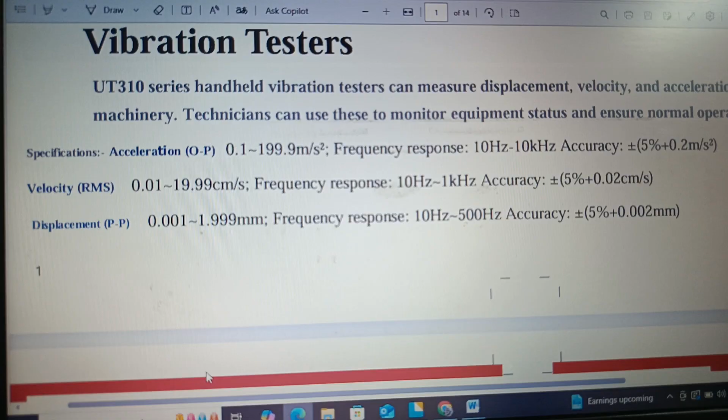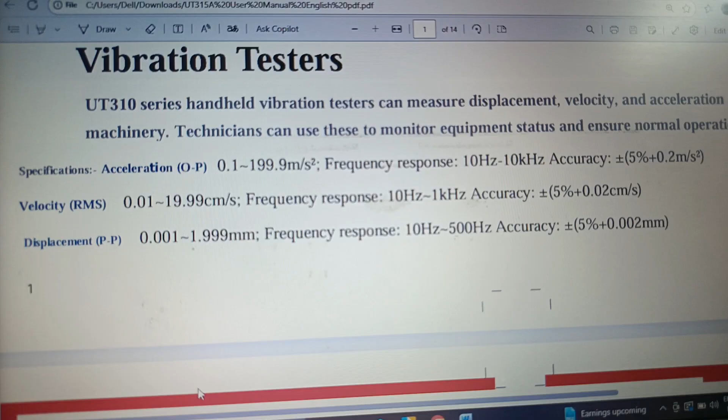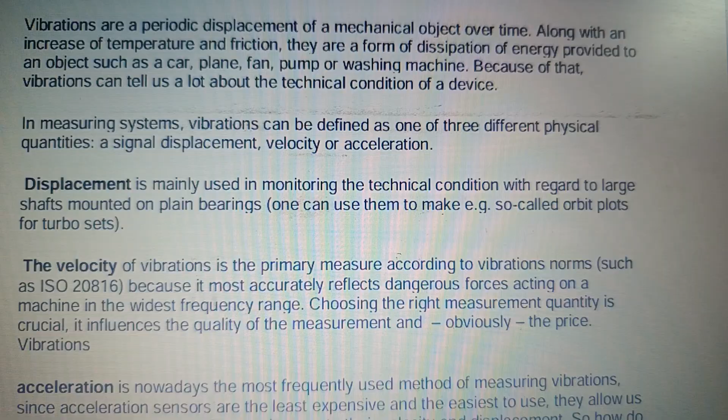Vibrations are a periodic displacement of a mechanical object over time, along with an increase in temperature and friction. They are a form of dissipation of energy provided to an object such as a car, plane, fan, pump or washing machine. Because of that, vibration can tell us a lot about the technical condition of a device.

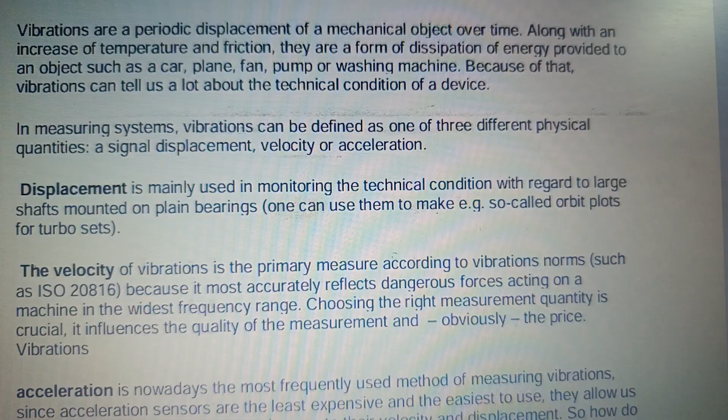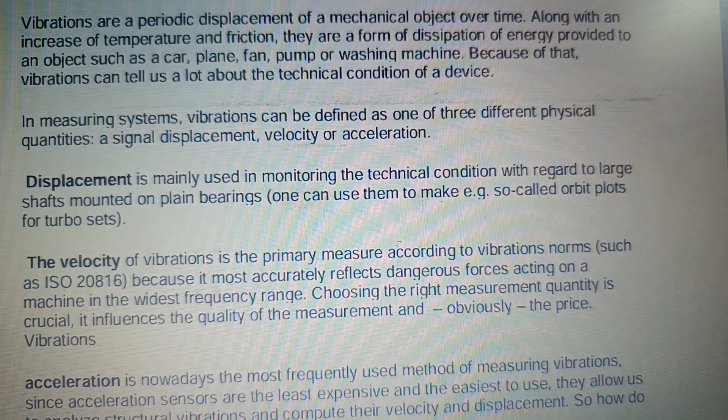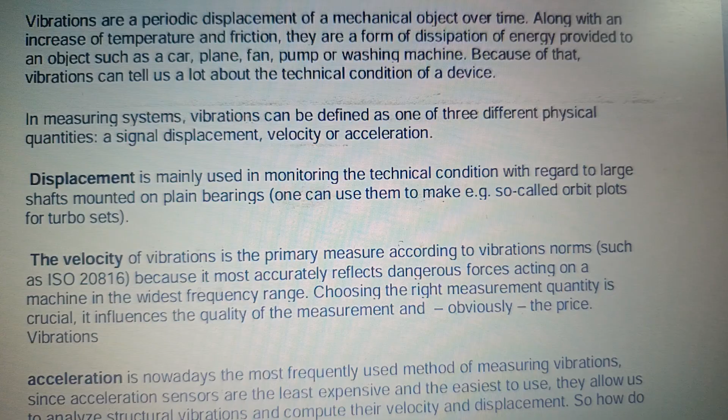In measuring systems, vibration can be defined as one of three different physical quantities: signal displacement, velocity or acceleration. Displacement is mainly used in monitoring the technical condition with regard to large shafts mounted on plain bearings. One can use so-called orbit plots for turbo sets.

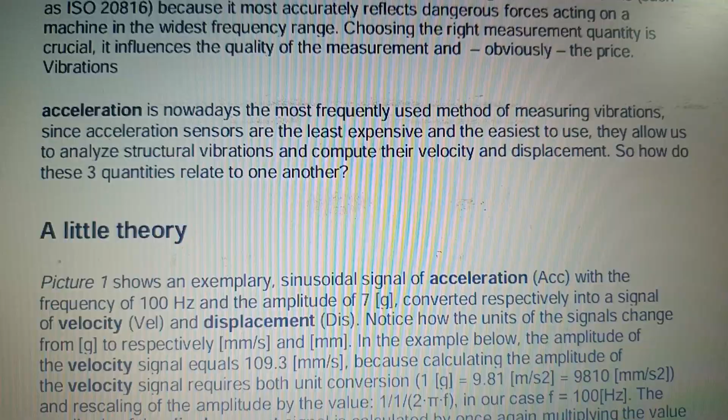The velocity of vibration is the primary measure according to vibration norms, because it most accurately reflects a dangerous force acting on a machine in the widest frequency range. Choosing the right measurement quantity is crucial in influencing the quality of measurement and obviously the price.

Acceleration is nowadays the most frequently used method of measuring vibration, since acceleration sensors are the least expensive and allow us to analyze vibration and compute their velocity and displacement. So how do the three quantities relate to one another?

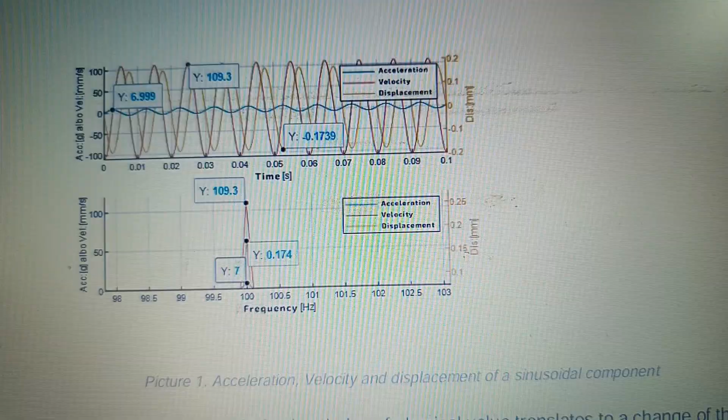Picture 1 shows a sensor signal of acceleration ACC with a frequency of 100 Hz and amplitude of 7 converted respectively into a signal of velocity and displacement. Notice how the unit of the signal changes respectively to mm per second and mm in the example below. The amplitude of the velocity signal equals 109.3

mm per second. Because calculating the amplitude of the velocity signal requires both unit conversion, 1g is equal to 9.81 meter per second square, which is equal to 9810 mm per second square, and recalculating the amplitude by the value 1/(2 × pi × f), where in our case f is equal to 100 Hz.

The amplitude of the displacement signal is calculated by once again multiplying the value of the velocity signal amplitude by the rate 1/(2 × pi × 100), as shown in figure 1. Conversion of the physical unit does not change the frequency value of the component. Using this method, one can convert between quantities describing vibration. It is worth noting that in general the acceleration signal is the highest and displacement signal the least.

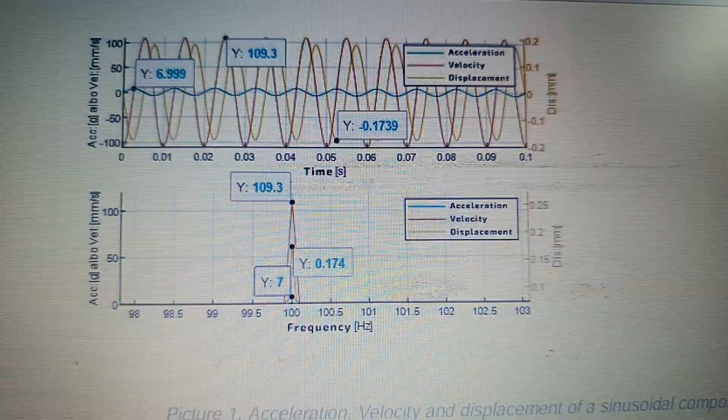In spectrum analysis, the choice of physical value translates to a change of the spectrum shape, and so in figure 2, the acceleration signal boosts the component with

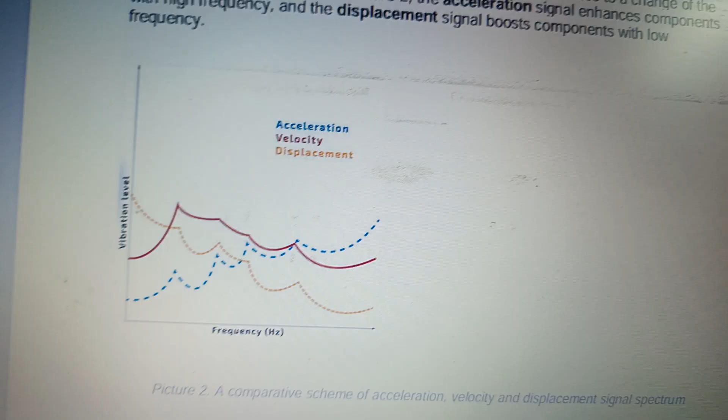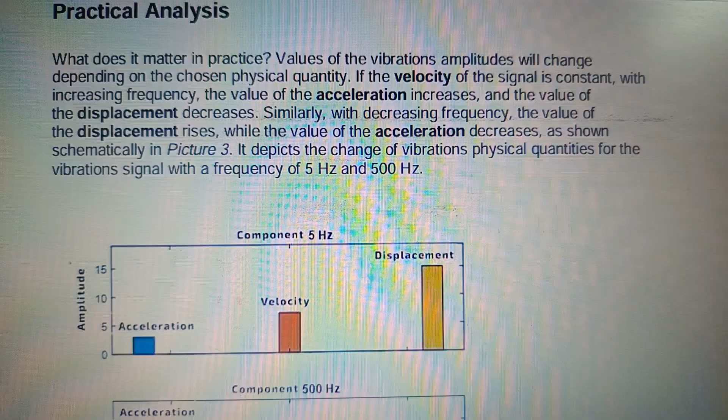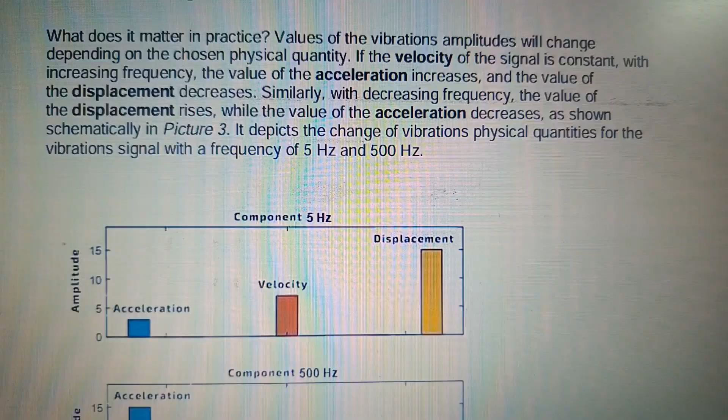Practical analysis: why does it matter in practice? The value of the vibration amplitude will change depending on the chosen physical quantity. If the velocity of the signal is constant with increasing frequency, the value of acceleration increases and the value of displacement decreases. Similarly, with decreasing frequency, the value of displacement rises while the value of acceleration decreases.

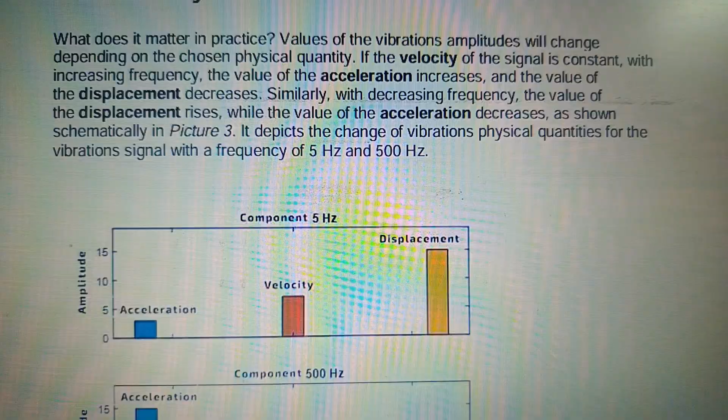Similarly, picture 3 depicts the change of vibration physical quantities for the vibration signals with the frequency of 5 Hz and 500 Hz,

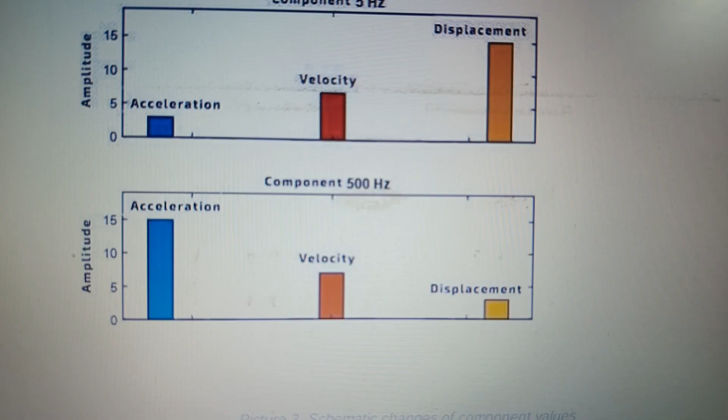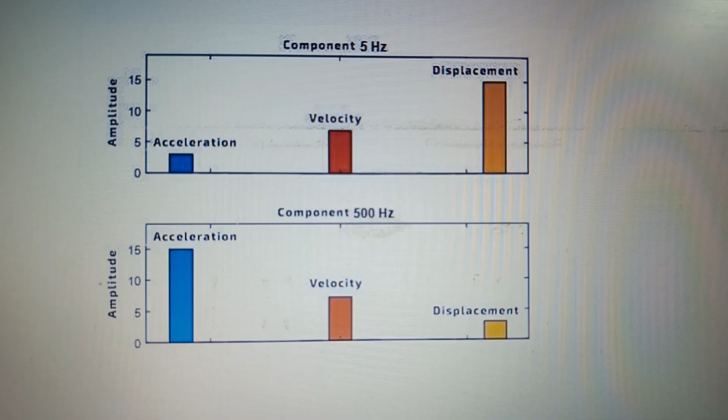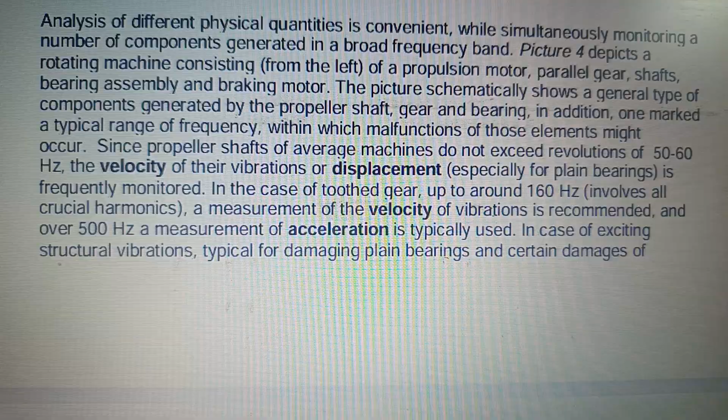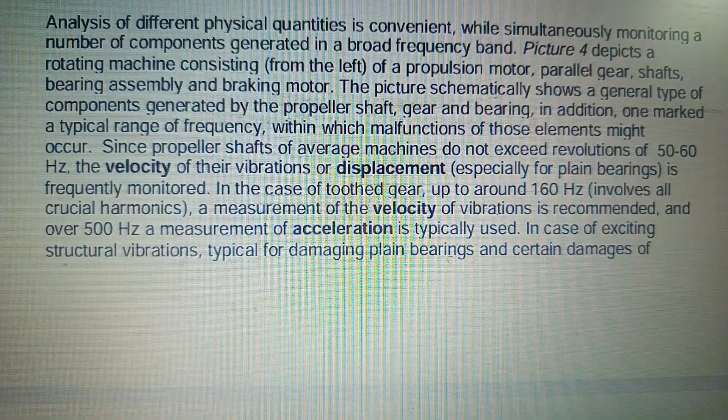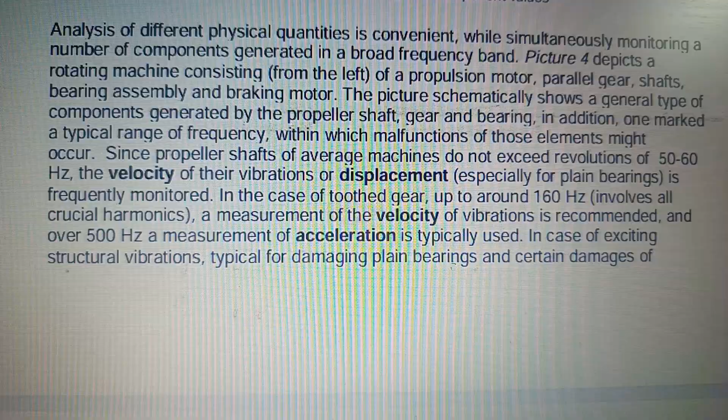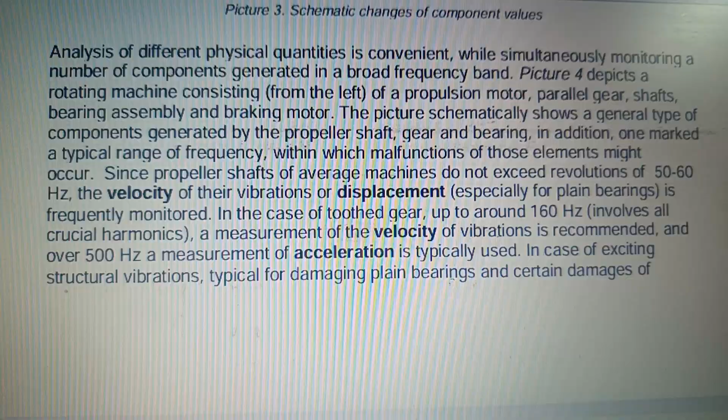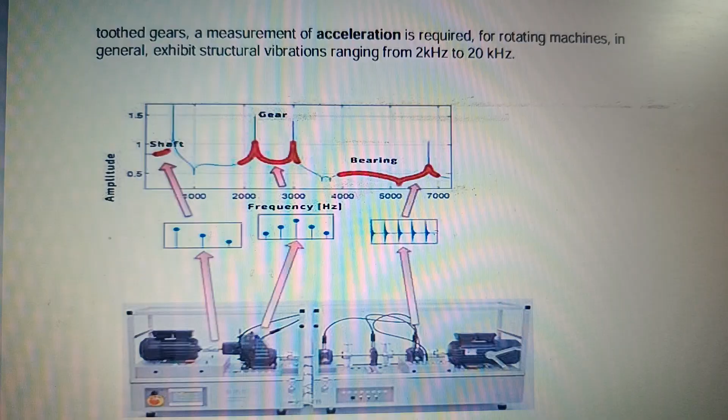For toothed gear, measurement of acceleration is required for rotating machines, in general exhibit structural vibrations ranging from 2 kHz to 20 kHz,

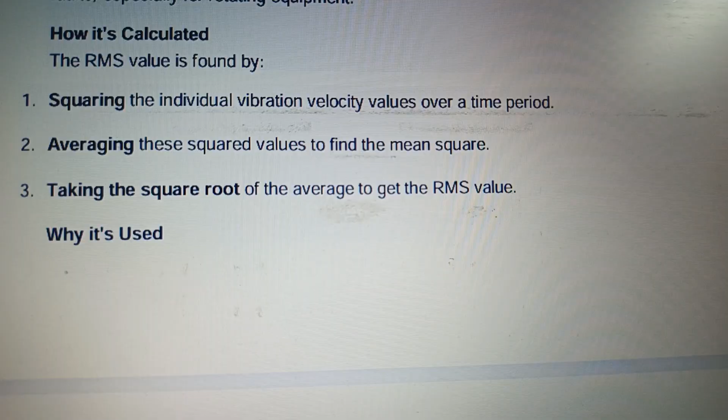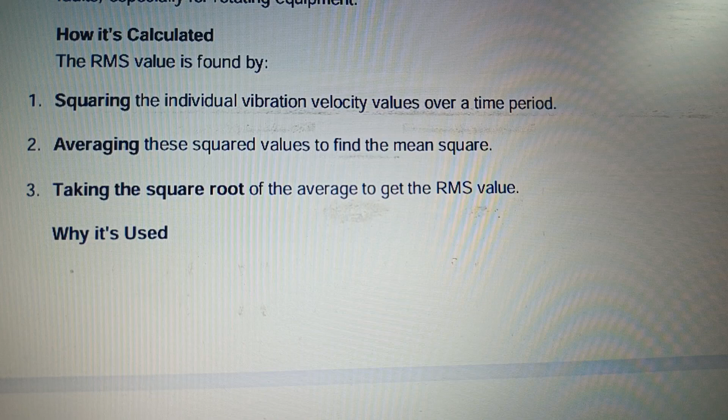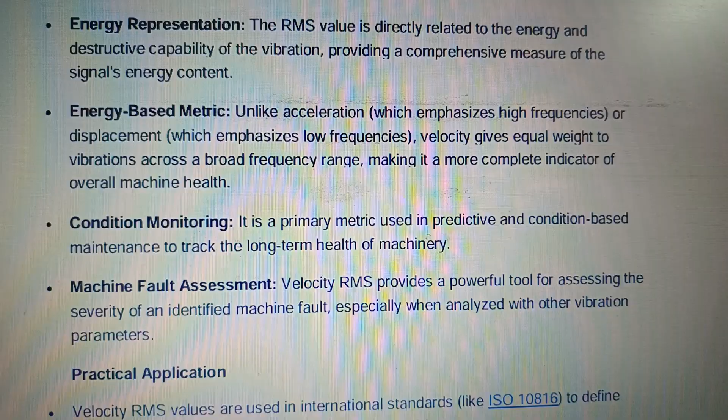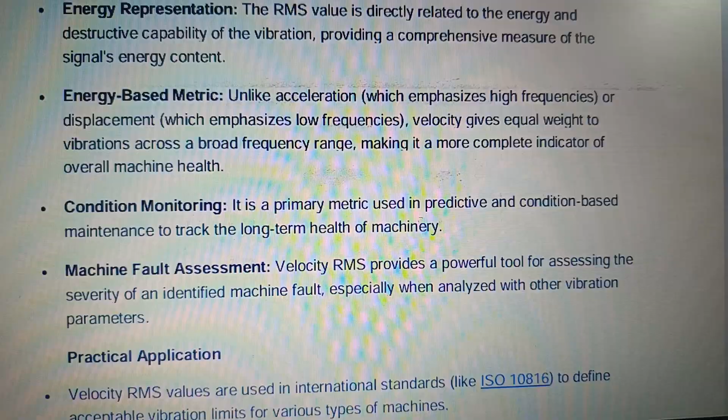squaring the individual vibration velocity values over a time period, averaging these squared values to find the mean square, and taking the square root of the average to get the RMS value. Why it's used? Energy representation. The RMS value is directly related to the energy and destructive capability of the vibration, providing a comprehensive measure of the signal energy content.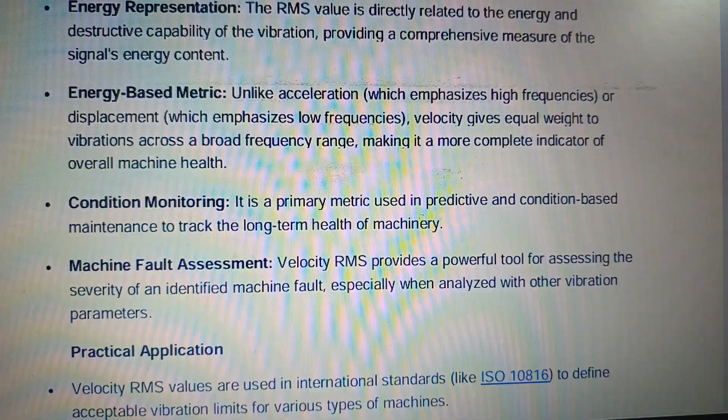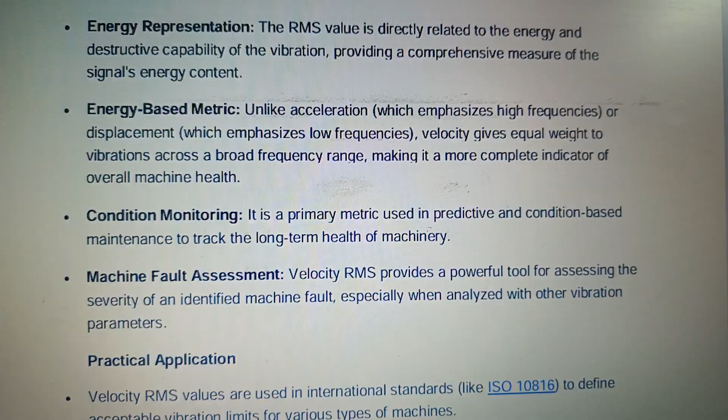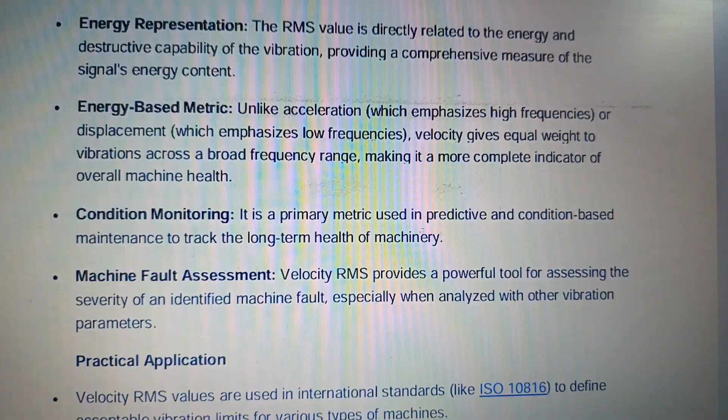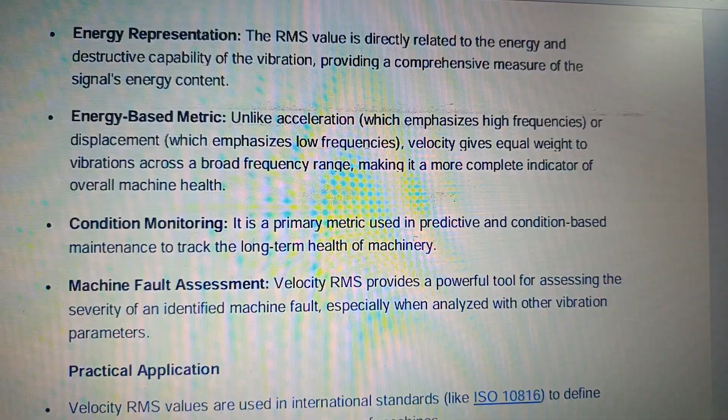Energy-based metrics: unlike acceleration, which emphasizes high frequency, or displacement, which emphasizes low frequency, velocity gives equal weight to vibration across a broad frequency range, making it a more complete indicator of the overall machine health condition. Monitoring condition: it is a primary metric used in predictive and condition-based maintenance to track the long-term health of machinery.

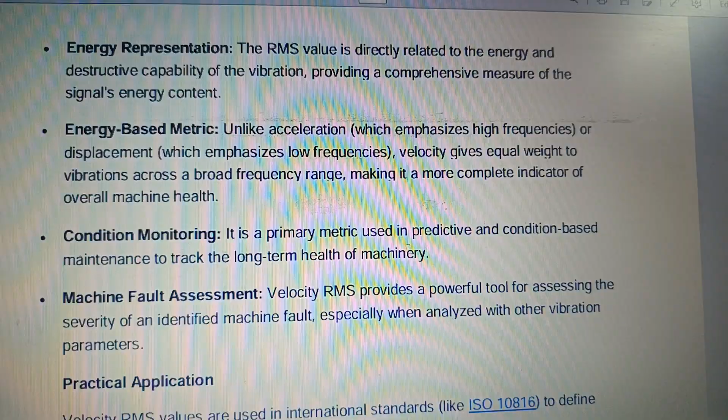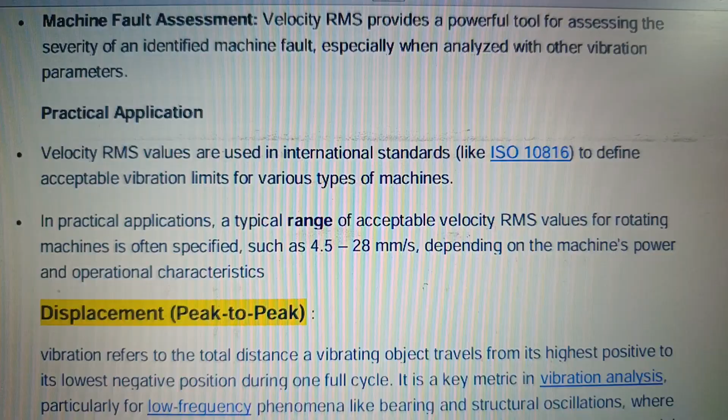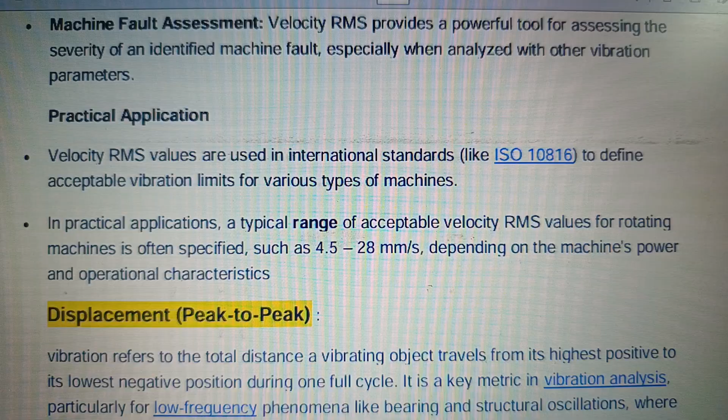Machine fault assessment: velocity RMS provides a powerful tool to estimate the severity of identified machine faults, especially when analyzed with other vibration parameters. Practical application: velocity RMS values are used in international standards for acceptable vibration limits of various types of machines. In practical application, a typical range of acceptable velocity RMS values for rotating machinery is often specified, such as 4.5 to 28 millimeters per second, depending on the machinery power and operating characteristics.

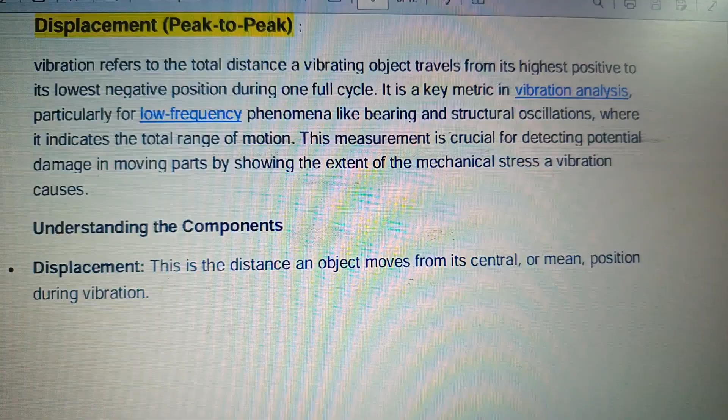Displacement peak to peak. Displacement peak to peak vibration refers to the total distance a vibrating object travels from its highest position to its lowest negative position during one full cycle. It is a key metric for vibration analysis of low frequency phenomena like bearing and structural oscillation, where it indicates the total range of motion. The measurement is critical for detecting potential damage in moving parts by showing the extent of the mechanical stress vibration causes.

Understanding the components: displacement is the distance the object moves from the central mean position during the vibration. Peak to peak: this value represents the difference between the maximum positive amplitude and the maximum negative amplitude of the vibration waveform. Why it is used? Low frequency vibration: displacement is the dominant measure for low frequency, that is below 1200 cpm or 20 hertz, in structures and rotating machinery. Mechanical stress: the peak to peak value is directly related to mechanical stress and can be used to identify potential machine damage before it causes severe failure.

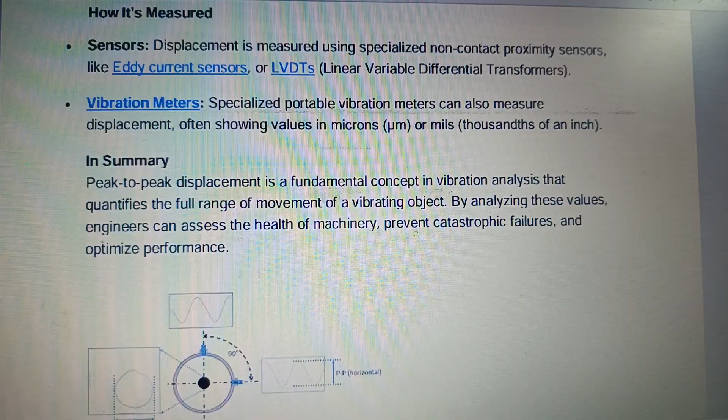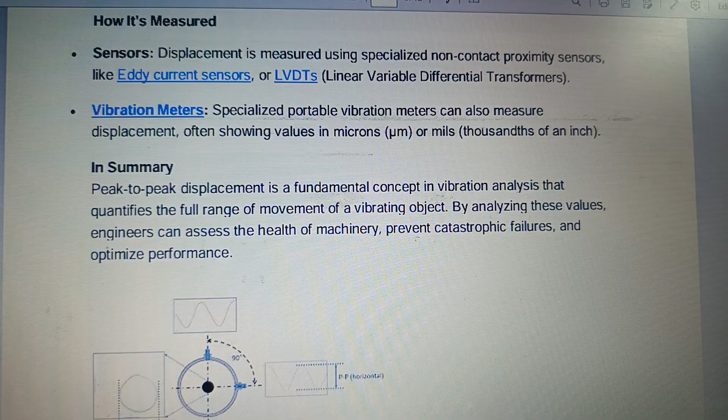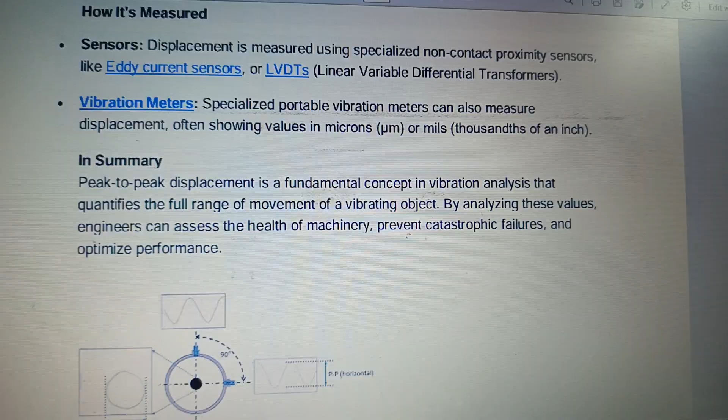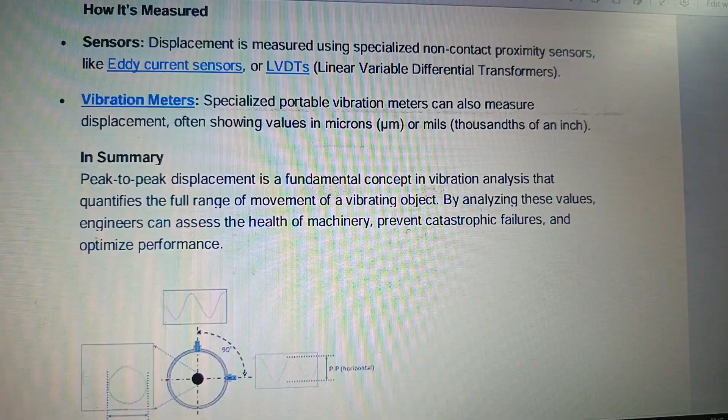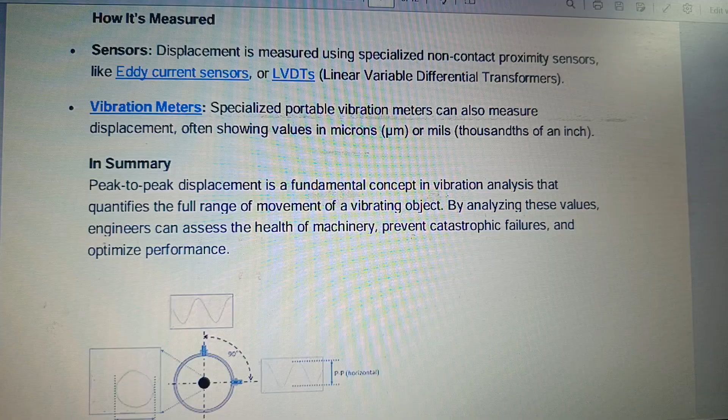In summary, peak to peak displacement is a fundamental concept in vibration analysis that quantifies the full range of movement of a vibrating object. By analyzing these values, engineers can assess the health of machinery, prevent catastrophic failures, and optimize performance.

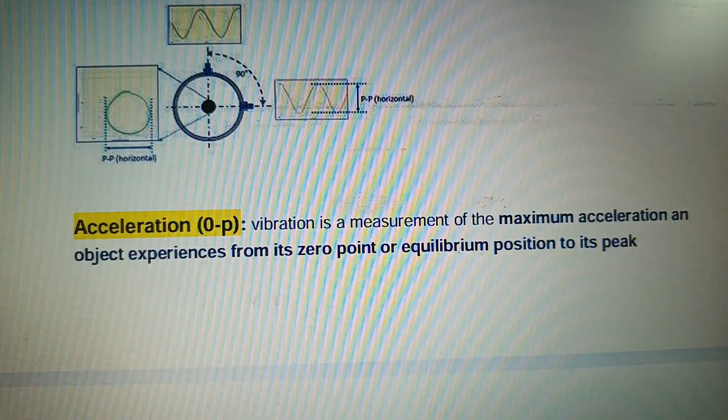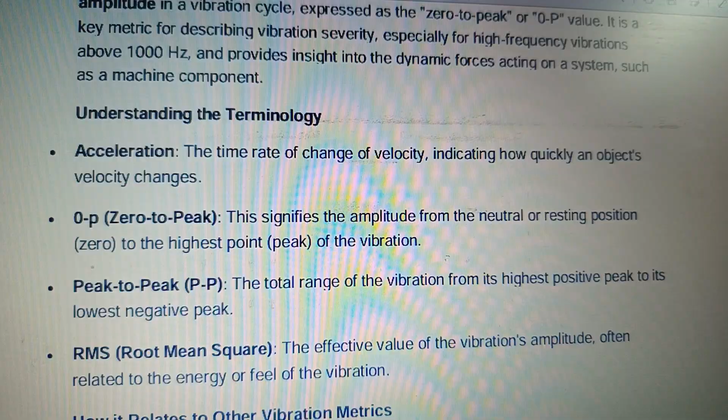Acceleration 0-P vibration is the measurement of the maximum acceleration an object experiences from its zero point, or equilibrium position, to its peak amplitude in a vibration cycle, expressed as the 0 to peak value. It is a key metric in describing vibration severity, especially for high frequency vibration above 1000 hertz, and provides insight into dynamic forces acting on a system such as a machine component.

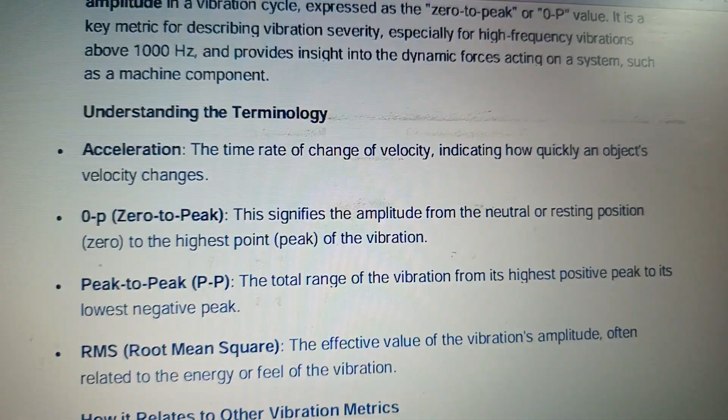Understanding the terminology: acceleration is the time rate of change of velocity, indicating how quickly an object's velocity changes. Zero to peak is the maximum deviation from the neutral resting position, zero to the highest peak in vibration. Peak to peak is the total range of vibration from the highest positive peak to the lowest negative peak. RMS, root mean square, is the effective value of the vibration amplitude, often related to the energy of the vibration.

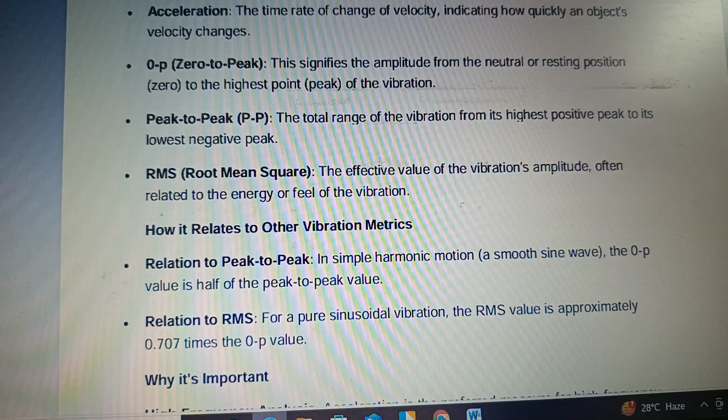How is it related to other vibration metrics? Relation to peak to peak: in simple harmonic motion, a smooth sine wave, the 0 to peak value is half of the peak to peak value. Relation to RMS: for pure sine vibration, the RMS value is approximately 0.707 times the peak value.

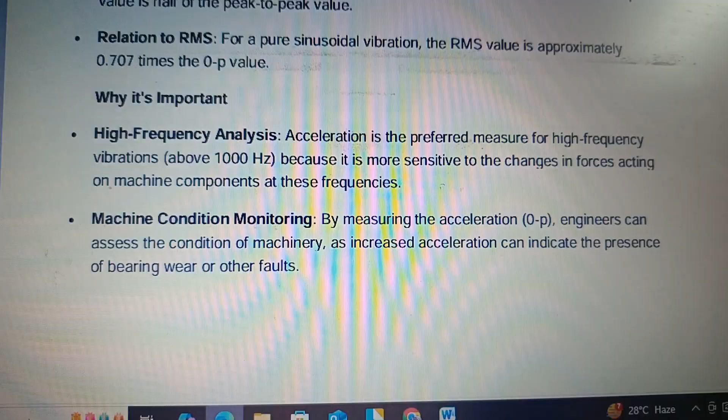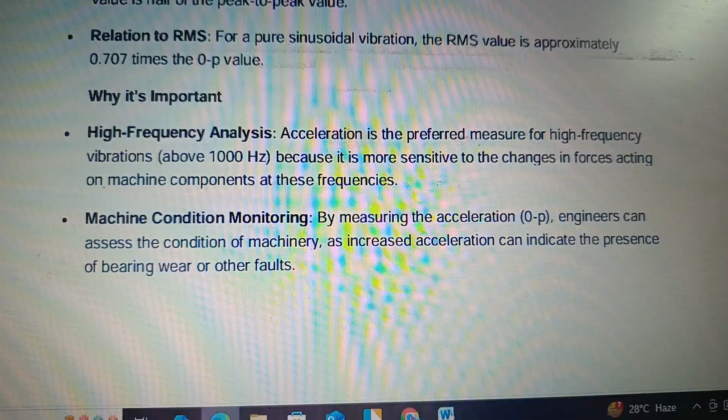Why is it important? For high frequency analysis, acceleration is the preferred measure for high frequency vibration above 1000 hertz because it is more sensitive to changes in force acting on machine components. For machine condition monitoring, by measuring the acceleration 0 to peak, engineers can assess the condition of machinery. Increased acceleration can indicate the presence of bearing wear or other faults.

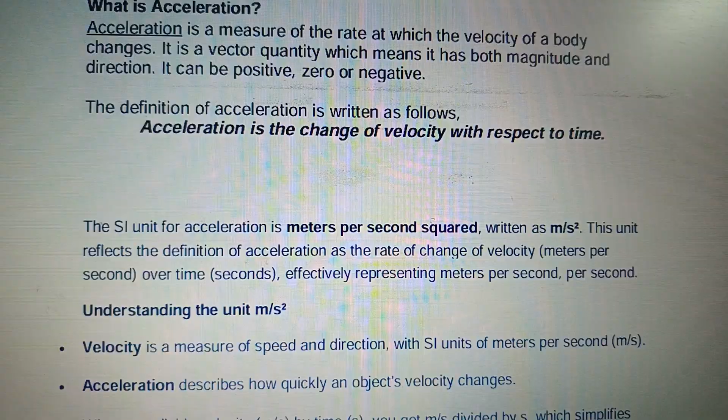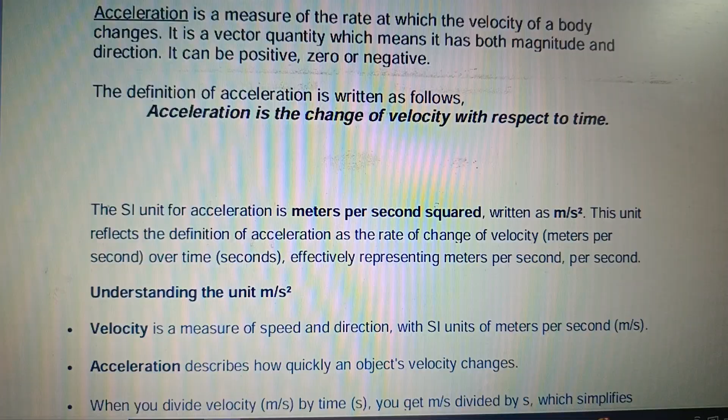What is acceleration? Acceleration is a measure of the rate at which the velocity of a body changes. It is a vector quantity, which means it has both magnitude and direction. It can be positive, zero, and negative. The definition of acceleration: acceleration is the change of velocity with respect to time.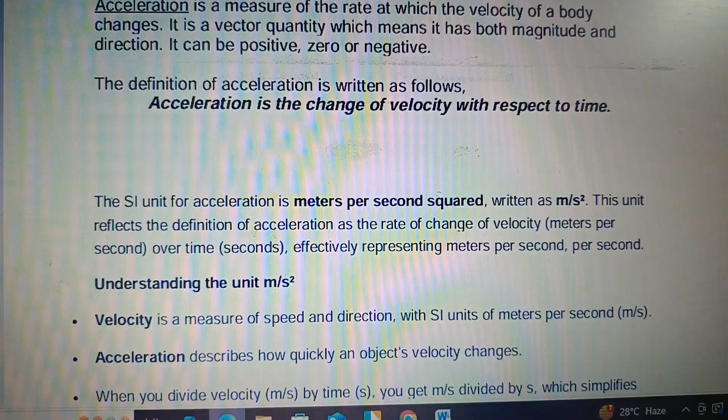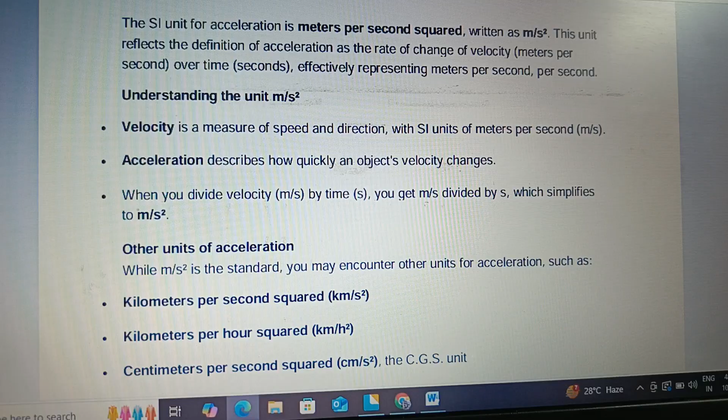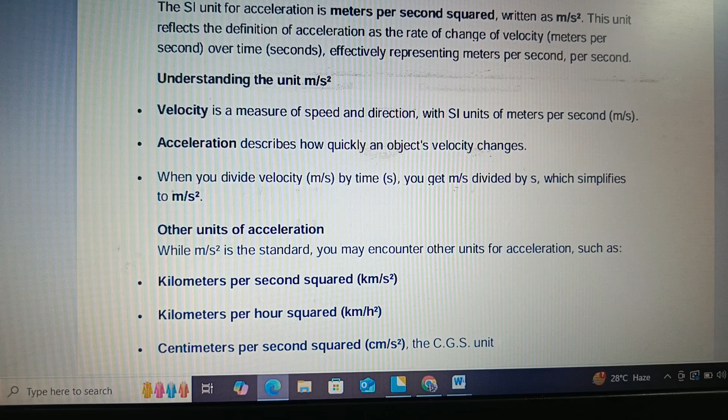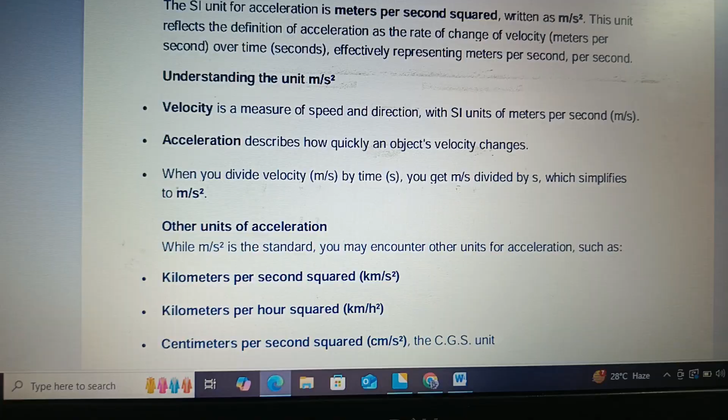The SI unit of acceleration is meter per second square, written as m/s². This unit reflects the definition of acceleration as the rate of change of velocity (meters per second) over time (seconds). Understand the unit: velocity is a measure of speed and direction with SI unit meter per second. Acceleration describes how quickly an object's velocity changes: m/s divided by time in seconds, which simplifies to m/s².

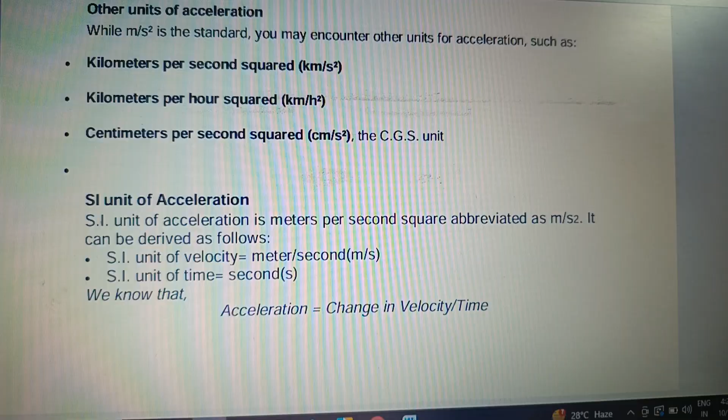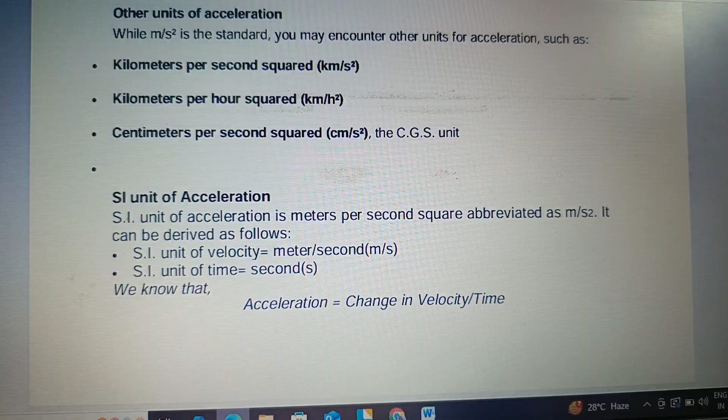Other units of acceleration: meter per second square is the standard unit, and other units include kilometer per second square, kilometer per hour square, and centimeter per second square. The SI unit of acceleration is meter per second square. Acceleration is equal to change in velocity over time.

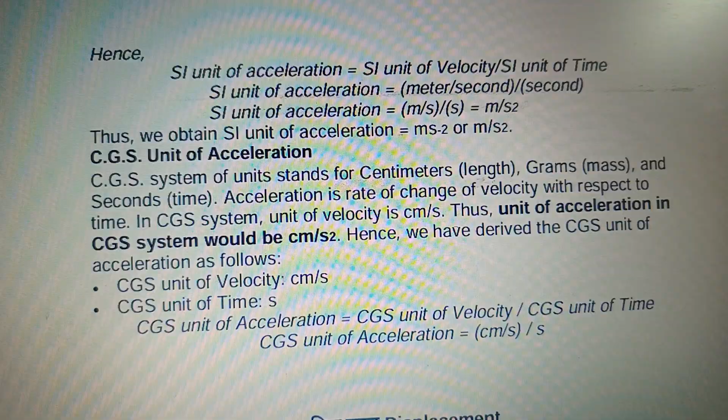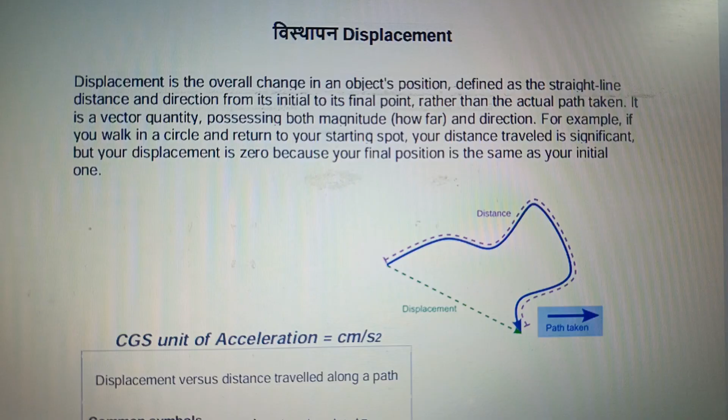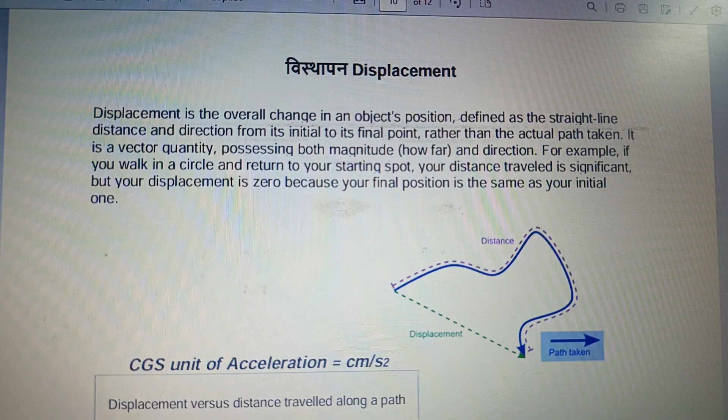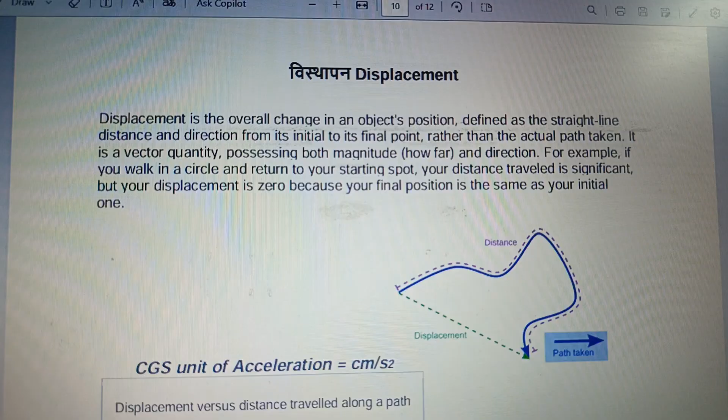Displacement is the overall change in an object's position, defined as the straight line distance and direction from its initial point to its final point, rather than the actual path taken. It is a vector quantity, possessing both magnitude (how far) and direction. For example, if you walk a circle and return to your starting spot, your distance traveled is significant but your displacement is zero because your final position is the same as your initial one.